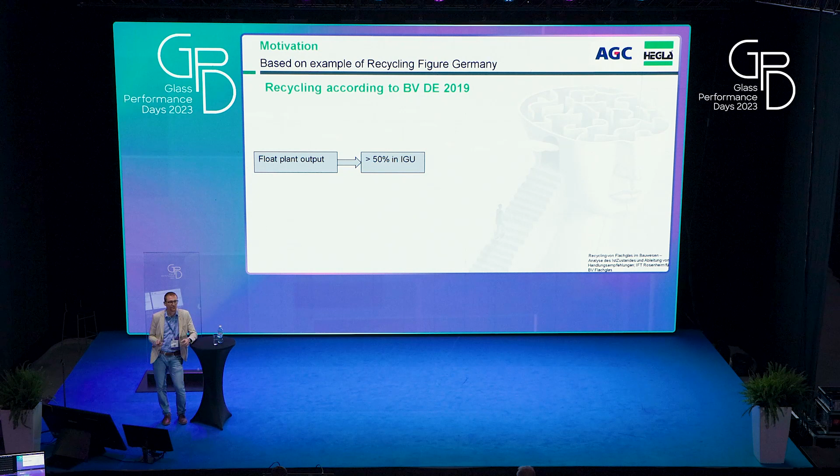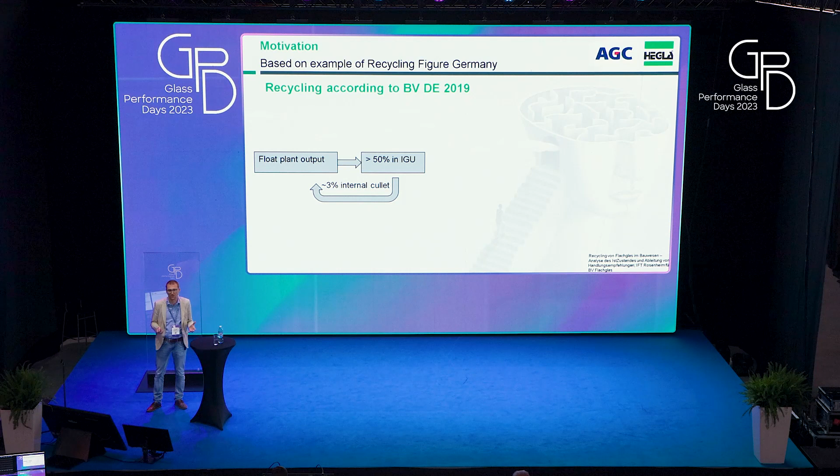Okay, so why are we doing this? Motivation. I think these numbers have been recurrent in many presentations so far, and the problem is there. We got a float plant output, a certain amount, and when you have this glass that is produced, 50% of this normally gets into IGU. So this tells us that IGU is the most widespread architectural glass product. Figures vary from country to country, but let's say there is pretty much 3% of internal cullet. These figures are from 2019, if I'm right. I'm sure that these figures are increasing for all the companies, and this is clearly good, and we hope that these numbers will keep on increasing.

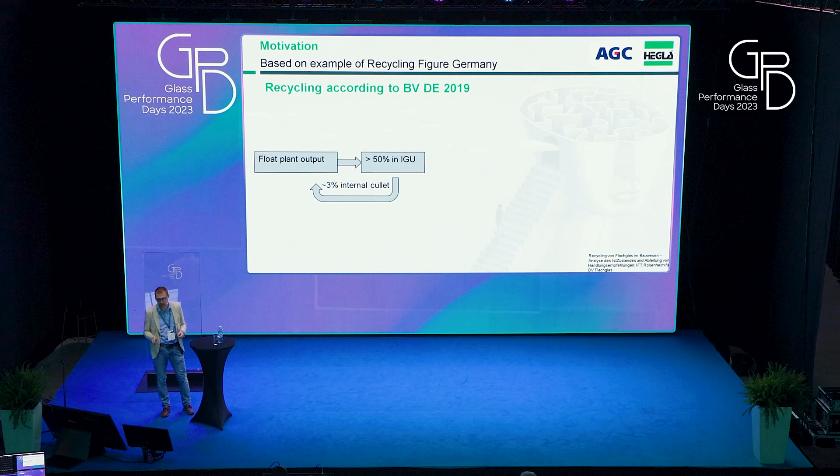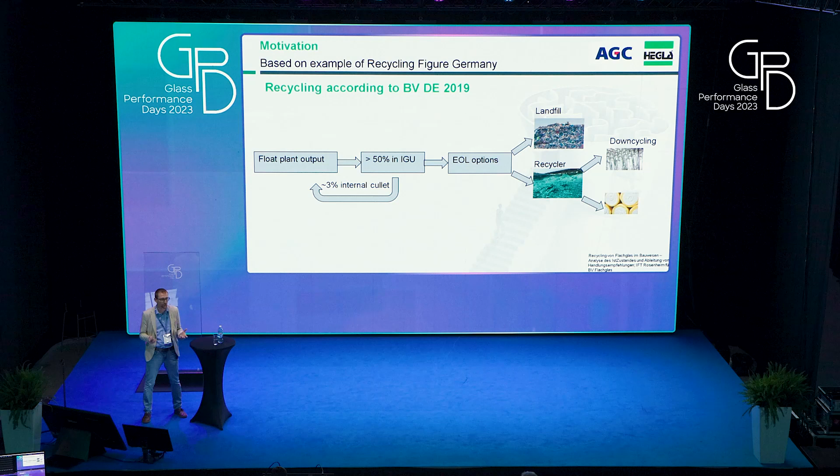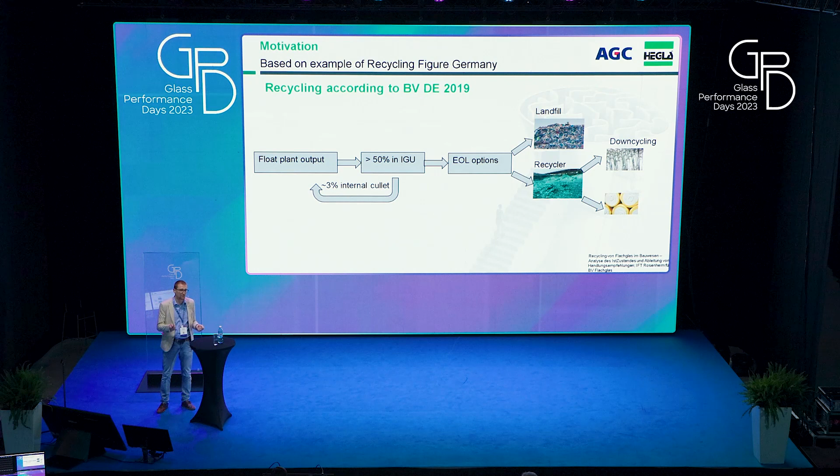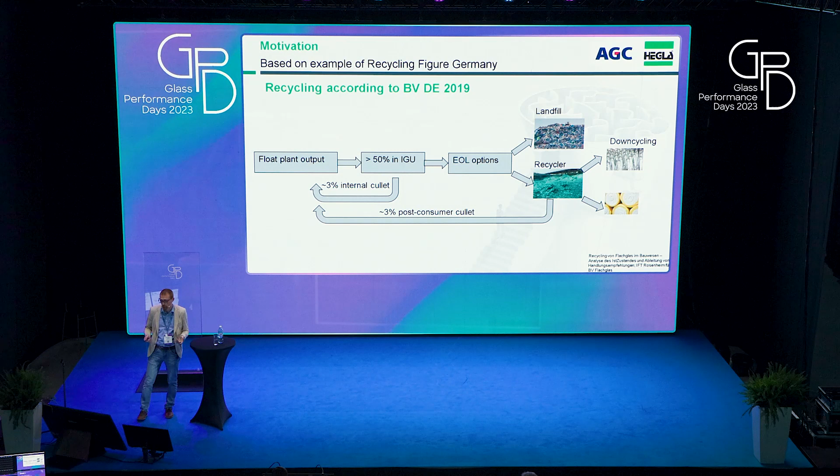But then, once these IGUs go into their building and they get used, they get to their end of life. So what options do we have? Landfill so far was one of the main options, and the other option is what we call the recycler option, so that the glass is collected by a waste collector, this is crushed, and there are some applications which are notably downcycling into other glass applications or other materials. The reason why this glass does not go back into the float plant is because of contaminants. So that's really the problem we were facing. And also, the amount of post-consumer glass that goes back into the float plant is in very low numbers. So can we maybe do something there?

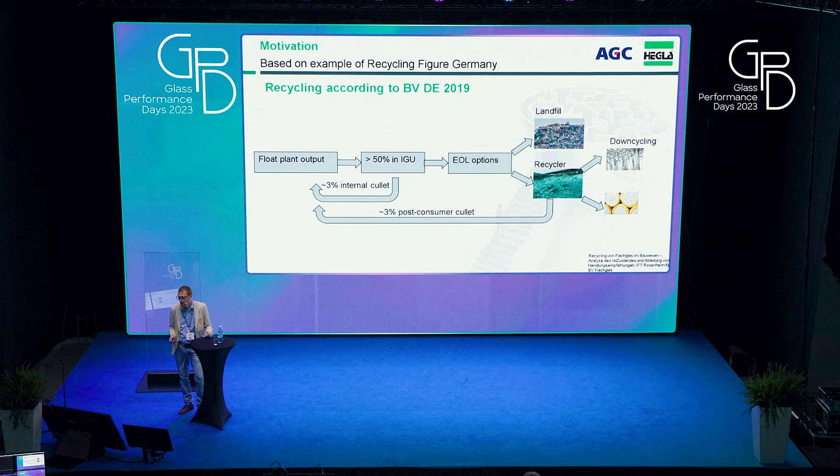So in order to face this problem, what was conceived? First of all, let's see what the concept is: let's try to valorize this scrap. The first thing that happens is that the glass gets back into the float plant. This can happen, okay? But float plants are not very widespread on the territory. For example, if you take EPDs, they have to make assumptions, and many times the assumed distance from the building to the float plant is in the range of 1,000 kilometers. So if we are using the glass for recycling and consider only the transport, very likely this glass will travel a long distance. But yet, it's a good thing to do, and we should encourage it, and we should do it. And the method is what I mentioned before: the glass is collected, crushed, then sorted, and then remelted, and then you can make new products, but by remelting.

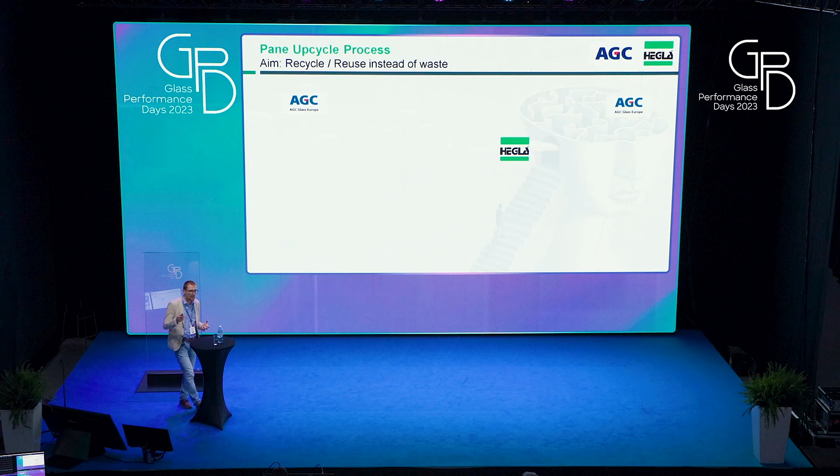Reuse is much easier to use as a term, so forgive me if I mix the two, but when I say reuse, I do not advocate to reuse the IGUs because we all know that they have a certain lifespan, so disassembling from a building and bringing it somewhere else could just be a waste of energy because it will fail eventually, okay? So if we can conceive that we can upcycle this glass, so separate the single panel of an IGU to make something new out of it, remanufacture out of it, how can things go?

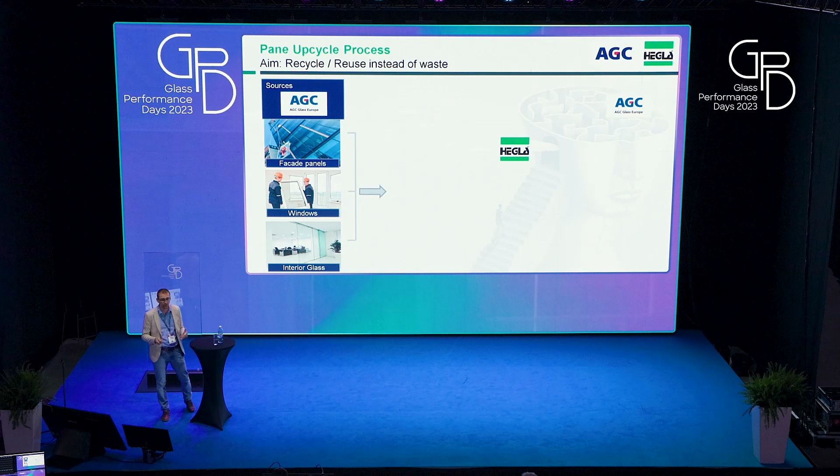We partnered HEGLA and AGC together, where HEGLA is a machine manufacturer, and AGC is a float glass manufacturer and glass processor. And so the idea is that we will collect post-consumer glass directly from the building, whether facade or interior or you name it, everything that has a value. And then it will go through a machine which has the role of slicing the two panels of the glass independently. And so in this way, you will have the two panels that are separated.

What can you do with that? This could become a cullet of a quality that the recyclers cannot match. And so that will be a high added value already for some activities that all companies are trying to implement right now. But also, we can think of remanufacturing with this, which would be very practical. What can we do? We can do IGUs, we can do partitions, we can do furniture, and clearly in order to redo something, we have to qualify what we are doing.

For those who did not attend the talk on the qualification of the glass for reuse, I inform you that there is a journal paper which will soon be published in Glass Structures and Engineering. It already went through the review process, by Angelica Rota, me and Professor Fiorito. There we explain what we did for clear float glass and how to reuse it, whether this is safe and what we foresee for that.

And that's why here we list some applications, because if the glass is good enough, probably the best thing we could do is an IGU. But if the glass is not good enough, there are other applications where the mechanical strength is not that important, and yet it's not downcycling because glass is still used for furniture and things like that. So it's quite interesting to see what we can do.

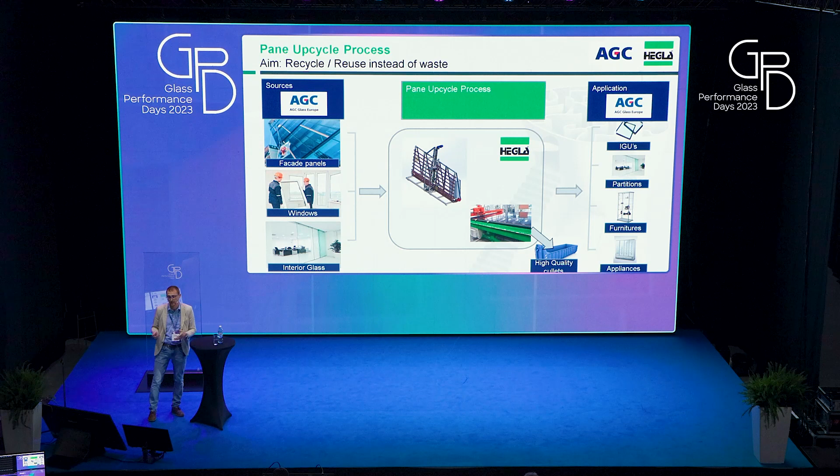So we will take the glass, and then following the waste hierarchy triangle, we choose what to do according to the glass type and according to the quality that this glass specifically has. So this new term, which I hope will spread, is remanucycling, because we need to be specific.

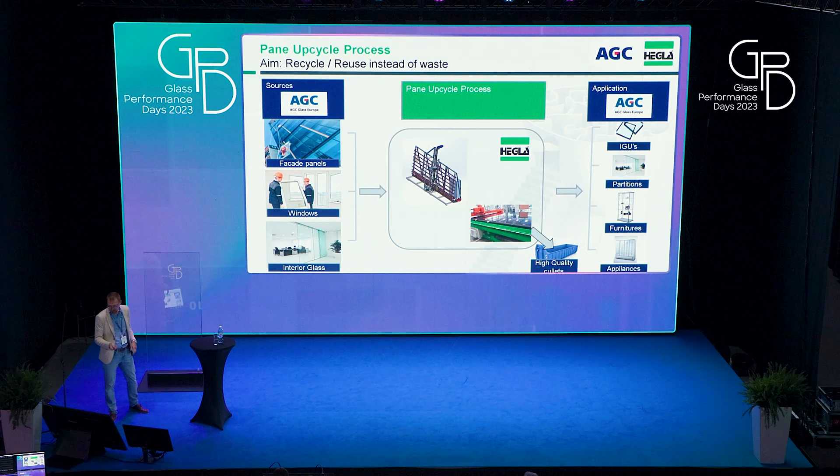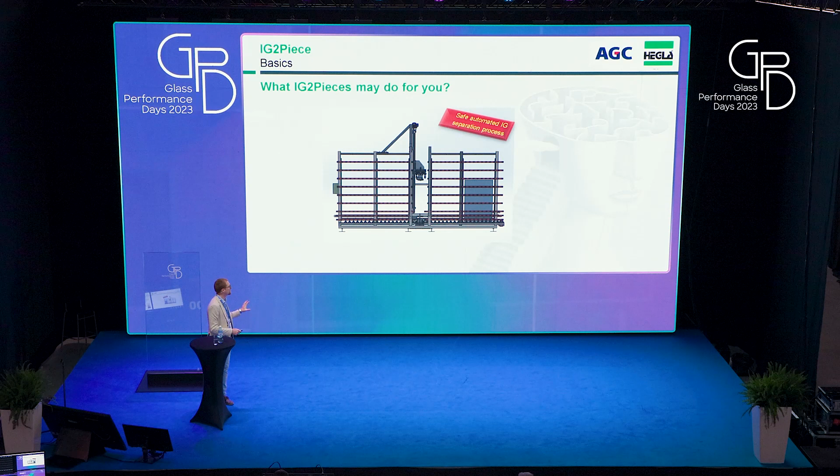So now, in detail, this small element of the machine there, let's magnify it a little bit. The way it's conceived is basically similar to an IGU line. You have these stands, and the glass gets loaded on the left-hand side, then it passes through the cutting process, and so out of an IGU, you get two glass panes.

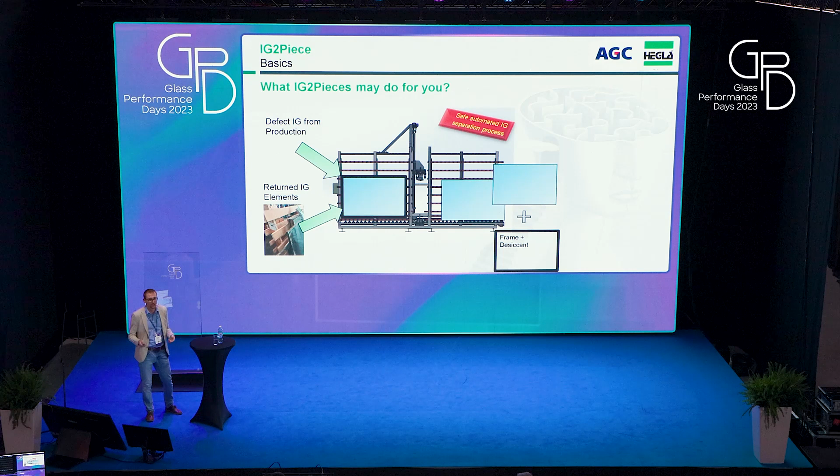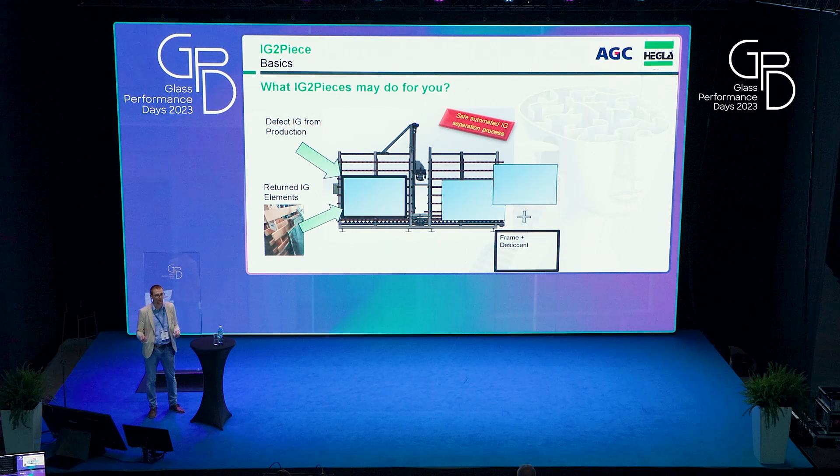In the bigger picture, we should also know that the IGU is not only glass, there's also spacer, desiccant, sealants, and if we do remanufacturing, we are not doing it on glass only, we are doing remanufacturing on all the components. The amount of work to do is huge, so far, as I represent a glass company, I focus on glass. So here is also an invite to all those who are interested in this remanufacturing process. If there is some workforce who want to remanufacture the other components, clearly there is a good opportunity there. And so in the end, we have these two panels.

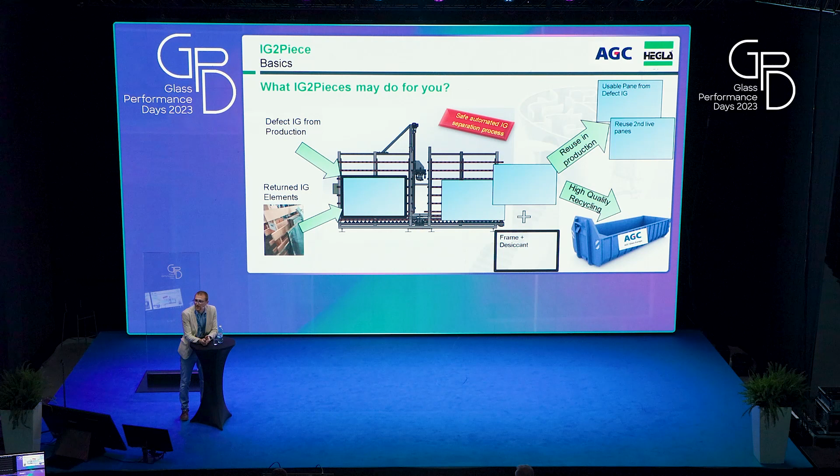We have the frame, we have the desiccant, and potentially we could also do some recycling. So far you only saw drawings, and then you say, okay, nice concept, nice stuff, nice drawings, then what? No, it's not a 'what' like that.

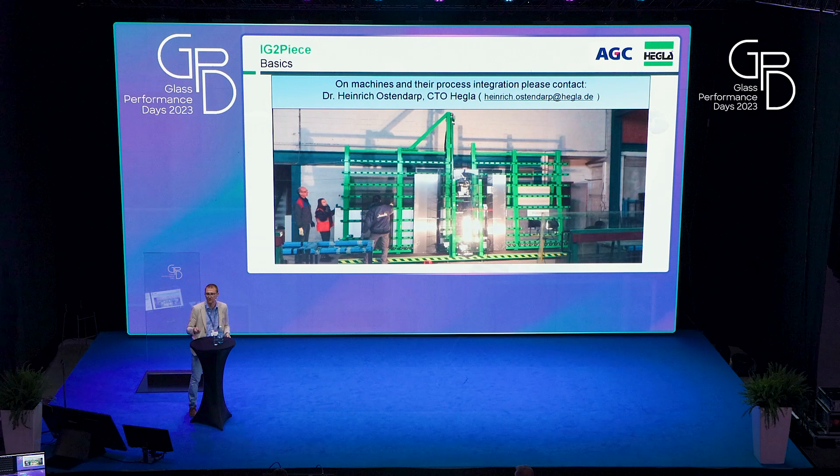The 'what' is real. This machine is a prototype for the moment and is in one of AGC's plants. As I speak, there are technicians operating it, we are fine-tuning, and we clearly want to go ahead as fast as possible into this process. But for those who like basketball, I like to mention Gregg Popovich - we cannot skip steps. So we really need to understand what we have to do, and we have to do it properly, because this is really important. We have to do this in the best way.

I'm not the representative of Hegla, but there is a stand of Hegla here, so I really invite you, if you want to know more about the machine, to get in contact with Dr. Ostendarp, who is also here with us. He can tell you more detail about the machine and when we are standing there.

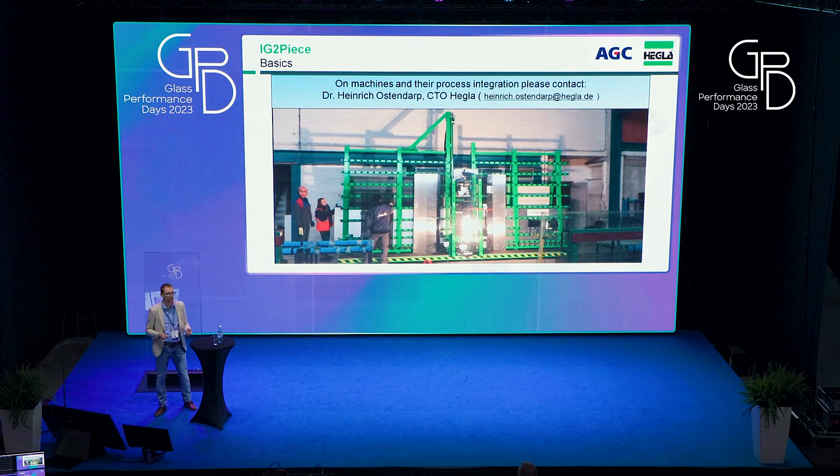So start to think about this machine - what can we do? Well, many things, sky's the limit, hopefully. This machine can do repair. What is repair? When you have a defective IGU, instead of having to redo it from scratch - recut the glass, grind the glass, put the sealant and so on - you could simply reopen it and try to reuse those same panels. Then you can recycle, of course, we mentioned that already, and then reuse.

Here we say 'future' because I'm an R&D guy, so I'm not here for a sales pitch. I'm telling you again about the lab mouse activity that I do from time to time, on a daily basis, and luckily some of these lab activities are not in the lab, but are in a factory where this machine is. So in terms of repair - you've got a defect in there, instead of redoing this IGU from the order point of view, you will just cut it. This will not only save material, but from a time point of view, it will help meet the timing of the customers. So these are things to be taken into account for the value that this machine can provide.

Then clearly, it can be used to get glass for recycling. We made a lot - okay, there are some facts about return on investment. But probably the best person to talk about these facts is Mr. Ostendarp, so I will not spend too much time on that.

And then on the reuse - that's not only the added value of what is on the glass, but clearly you can imagine I do not have figures of EPD for a remanufactured glass, but I let you assess by your own rationality that if you are not burning it, the advantage is going to be there, and it's going to be big.

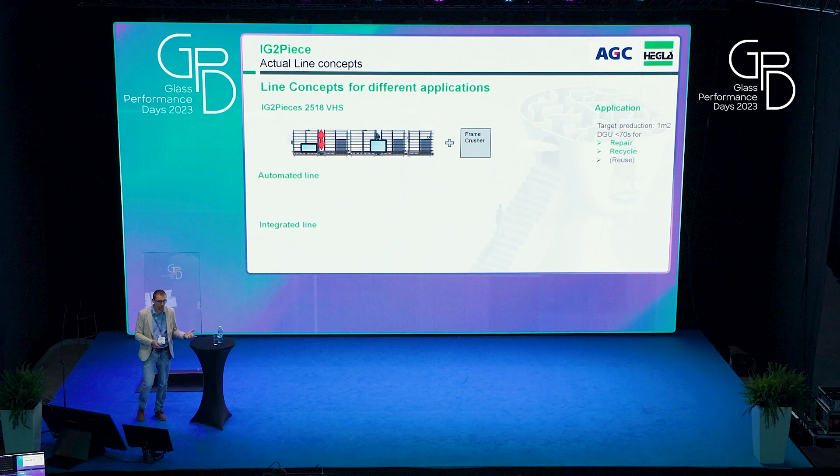But there are different concepts for the line - for example, you might have one only to prepare glass for recycling, so you separate the glass, and then you can have a frame crusher at the end of it. In that case, we expect that the quality of the cullet will be higher than what comes from the recycler, although I must say the test has not been done yet, so I don't have a value for that.

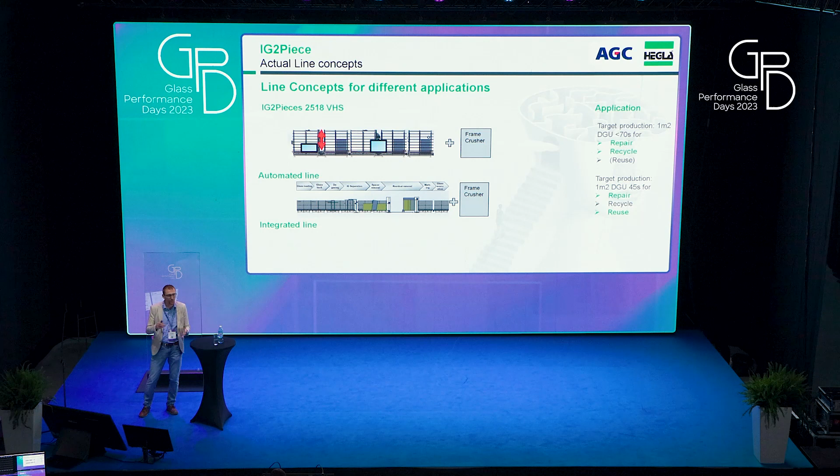But then there could also be an automated line, and that automated line might have something more than simply the separation of glasses - it could have some cleaning of the sealant, recuperation of the spacer, the desiccant, and what have you. And then there will be the fully integrated line, where this line could be integrated into a plant. The way I imagine it, to be honest, is that in a process plant, this could be back-to-back with a manufacturing IGU line - so in one direction you disassemble, then you turn the corner and it's manufactured on the other side.

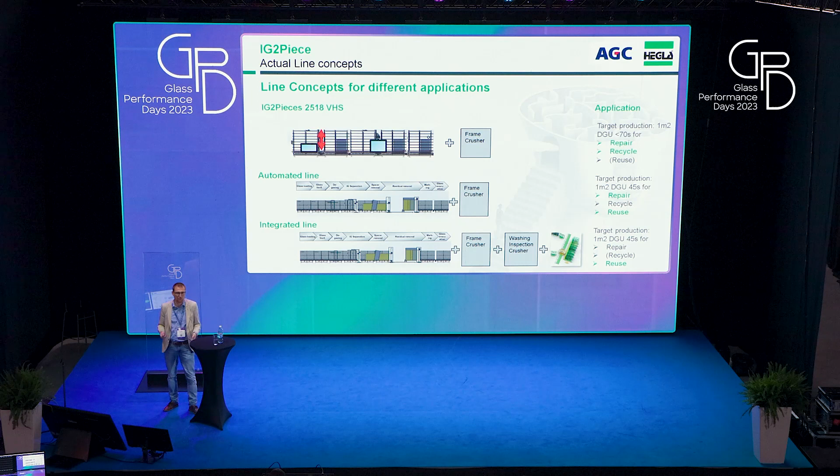And so, again, this is a collaboration between Hegla and AGC. That's the part of Hegla. What's the part of AGC? We wanted to evaluate what happens with the glass that comes out of the machine.

And one of the questions that many people ask is, okay, but this is post-consumer glass - what about warranty? You know, what's going on?

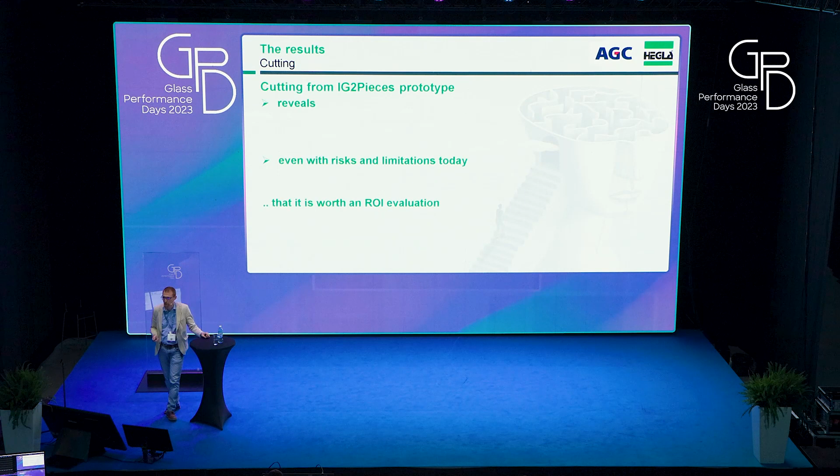And so we wanted to focus primarily on the sealant, because that's what matters for the IGU.

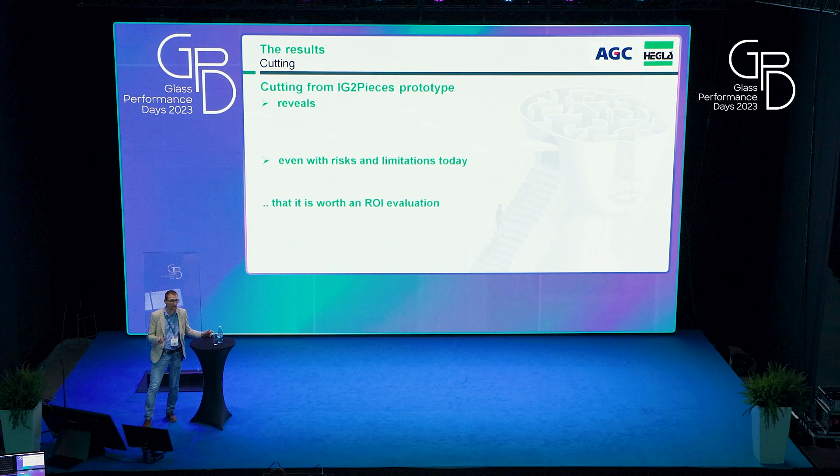Its energy performance is related to the tightness of the unit. And so what we did was identify three different series of glass.

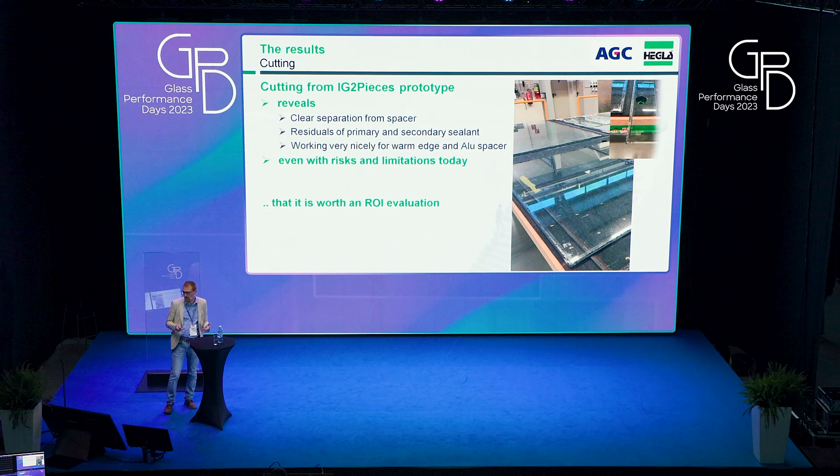Okay, this is still on the separation. So when we did the separation, that's how the residual looks like.

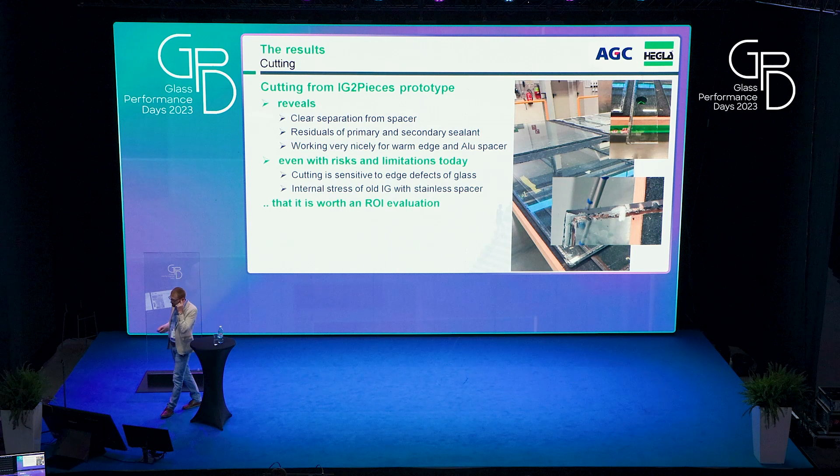That's another question people were asking: how clean is your glass out of it? We do not have an automated cleaning of it yet, so what you have out of the machine is somehow the pictures you can see here.

Some cuts are quite nice, and probably you don't need to do anything. Others, you will need to do some blading, some spatula usage. What we do right now, we do by hand—we pass a spatula to have a nice cleaned edge. But an automated line might have this part automatically cleaned, so you won't have this problem.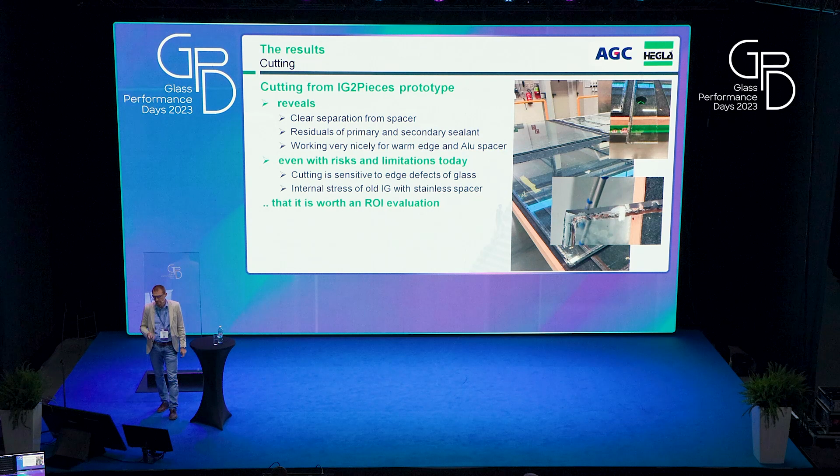Now I go to the part I was mentioning before—sorry for this hiccup, as I'm not the main speaker on that. That is validating the tightness of the IGU. So that's the edge, as you've seen on the previous slide.

What we do is clean it with a spatula and then run aging tests. The aging tests are made in accordance with EN 1279, meaning you want to verify it's tight versus climatic cyclic load, but you also want to verify that the sealant, once reapplied, is compliant with some tensile resistance, and the failure is always cohesive.

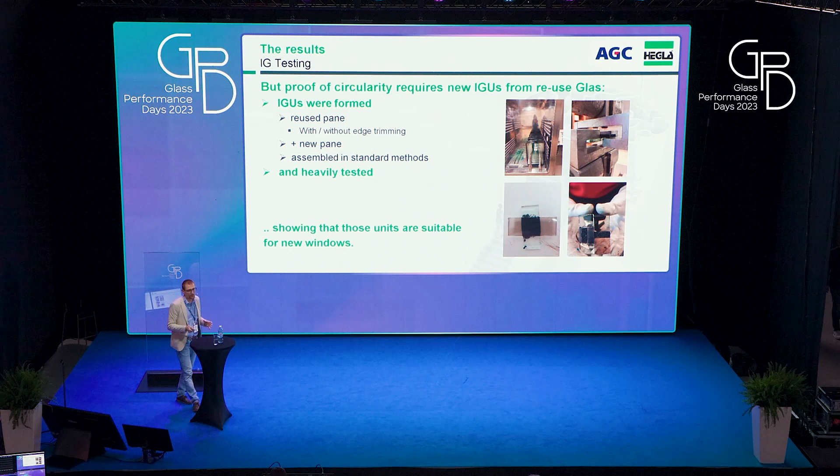So this is the test that we run at AGC. We had three different series. One is the post-consumer panel. How was this done?

Well, the way we see it, a new IGU will not be solely made of post-consumer glass because you probably need an up-to-date coating. So a new remanufactured IGU will be made of a new coated glass and an old post-consumer glass.

So imagine our post-consumer glass is normally a rectangle, which we will have to recut. You want to optimize your recutting—imagine shrinking a big rectangle into a smaller one. Instead of doing 4 cuts, we said let's try to keep the edges and see if this performs.

So the first series, with the reused pane, is made with one panel that is post-consumer, and on 2 sides is where sealant was formerly applied, and we reapplied the sealant right there.

This is also intuitive—if you have a piece of tape, put it on the table, and then remove it, the adhesion tends to get lost, right? So we really needed to do this test.

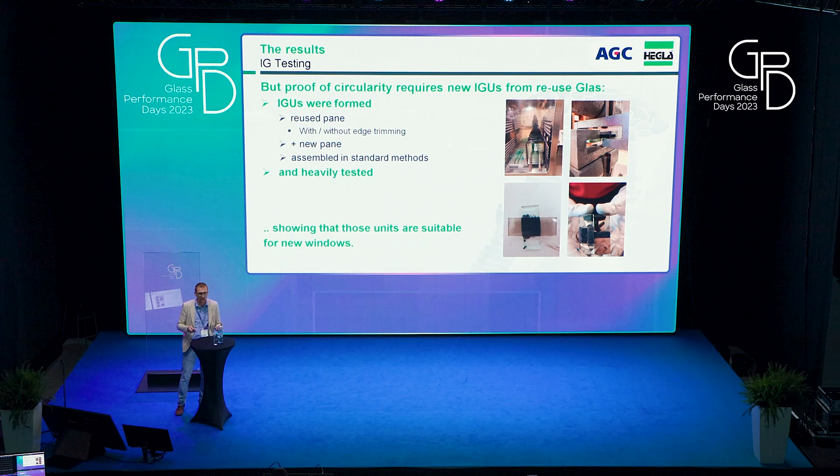We could predict it—maybe you guys know this better—but we had to do a little bit like San Tommaso, put the hand on the right spot.

So we did that. Then the other series was completely new pane, to have a reference benchmark. And then the other, we just trimmed the edge—it was still post-consumer glass, but the sealant was applied on an area where formerly there was no sealant, so we had no doubt about it.

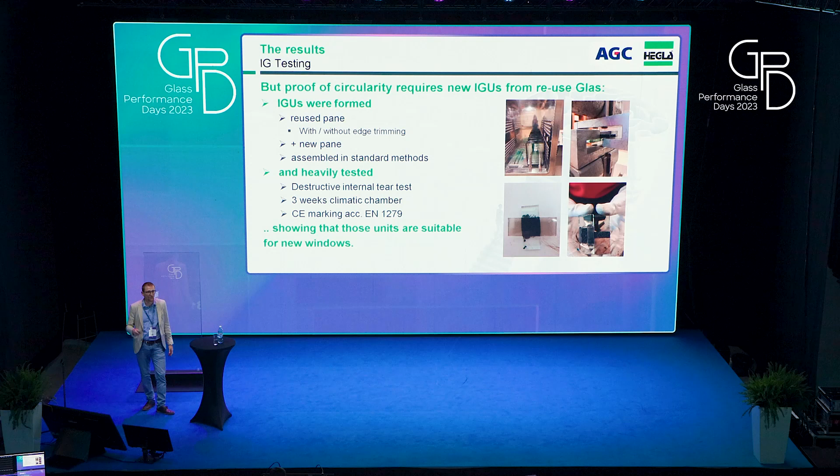Out of the tests, we could not spot any difference between the new and the post-consumer glass. So luckily, it seems there's no reason to trim the edges, the way we see it.

So, in conclusion, so far this machine has proven its potential for disassembling IGUs, and it will enable us to move on and give a new life to this glass.

It can be used for repair, recycling, and reuse, and it will also mean a serious reduction in terms of CO2 footprint.

It could also give us the possibility to take a bottom-up approach towards legislation, because legislation is a bit like us—we have a lot of work to do if we want to enable this, and maybe legislation is too busy with other things.

But if we prove the concept first from the bottom up, we can show as an example what can be done, and we hope this will become widespread in the future.